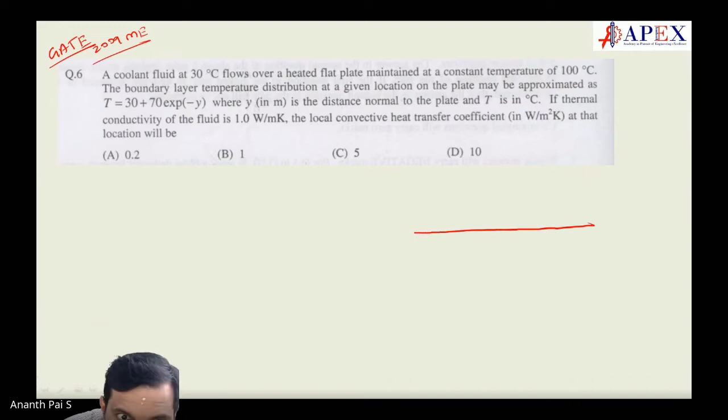It's a bit challenging, not that easy. It's easier only, but not to that extent. We will see.

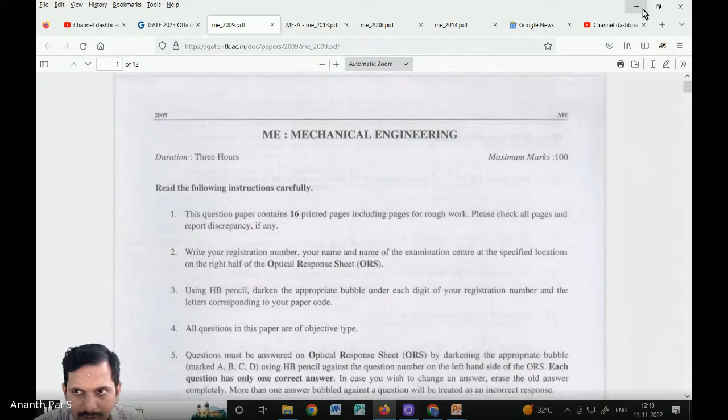Oh, they have not given the answer. We have to calculate. So let us do that. See, Agastya has got one. Let us see, this way would be better. Agastya has got one, what about you? One, Nihal has got one. Others? One. No doubt. So what is dt by dx? It is equal to minus 70 at y equal to 0.

What is q? Q is nothing but minus k into dt by dx. Small q is equal, k is given which is 1, dt by dx is given 70. So q is 70 watts. Fine, 70 watts per meter square.

Correct, correct, no? Okay, 70 watts per meter square. Now what happens? Q is also equal to h into delta T. What is Q? 70. What is h? Don't know. Delta T is 100 minus 30. So 70, so h is equal to.

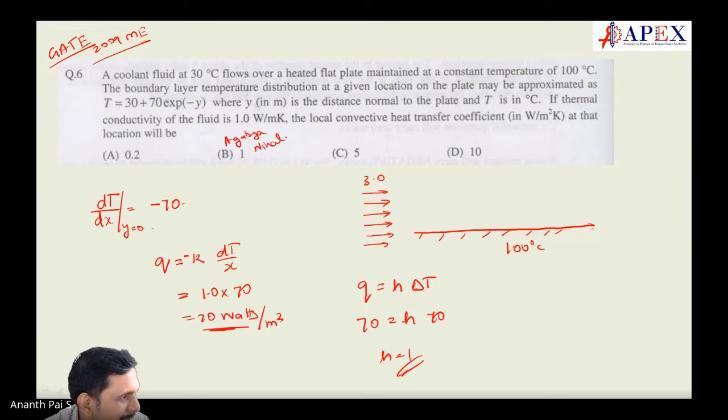So we have to see the previous one, right? Let us see some other question paper other than mechanical. Let us see whether we can find the chemical engineering question paper, how it is, we'll see. Production and industrial engineering has heat transfer too. No, it's thermodynamics, easy. So now first we will start with this. Just keep, let us go with PI. No, we'll go with chemical because chemical is tougher for heat transfer. Not tougher, easy heat transfer, easy. Thermodynamics is tough. So let us search chemical from 2022.

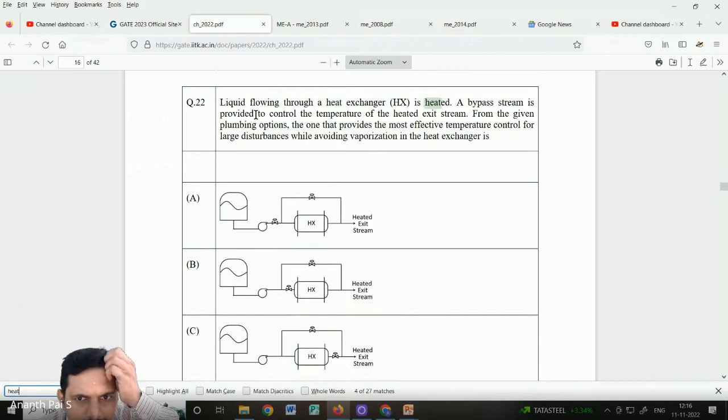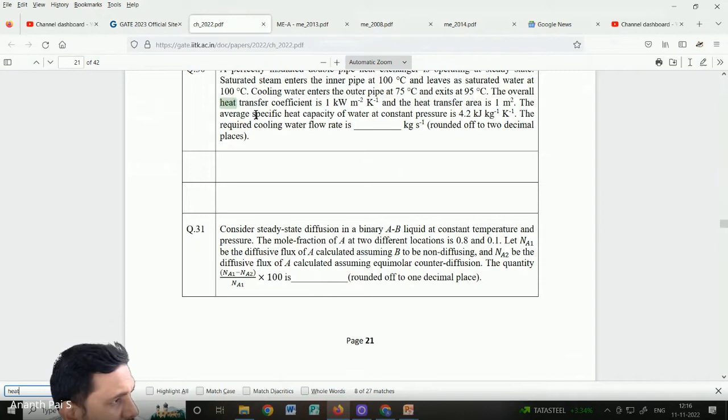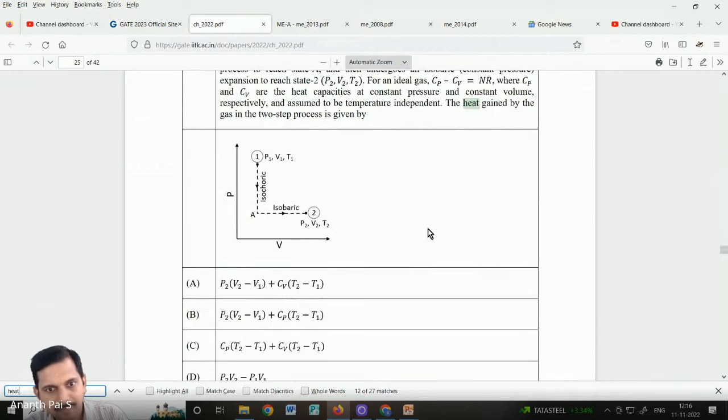This is heat exchanger. Okay, this is very important. Next topic would be this, where it is critical thickness of insulation. That question has come.

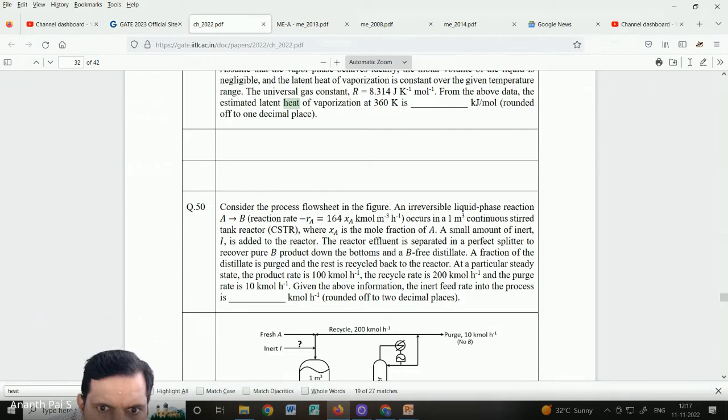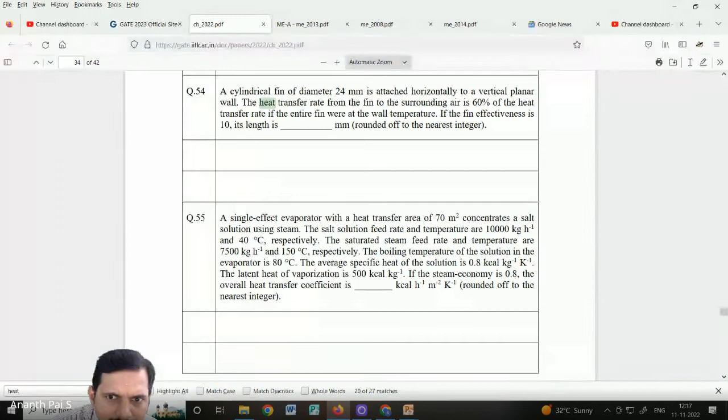Fantastic question that is. We have to come with fins, students. Yeah, there are a lot of questions on fins, which are really, really good.

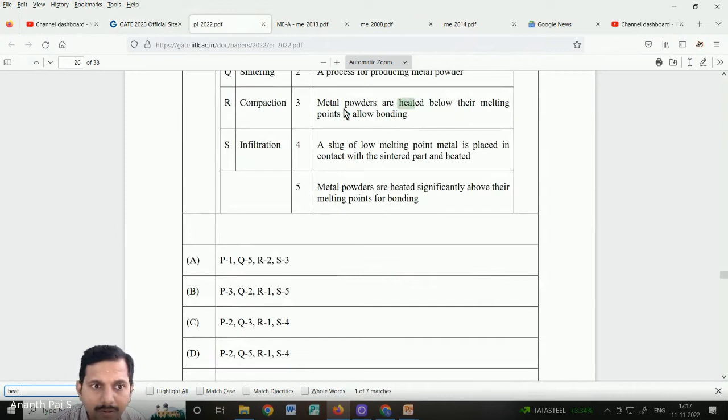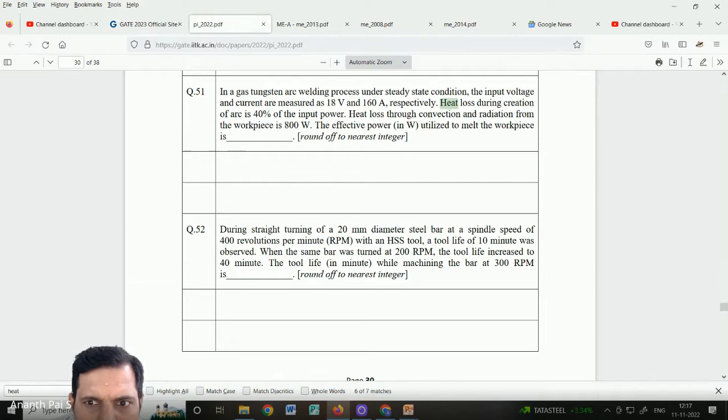No, this is not, nothing. So we'll see PI, where is PI? Nothing. Then what questions do we have? Metallurgy may be there.

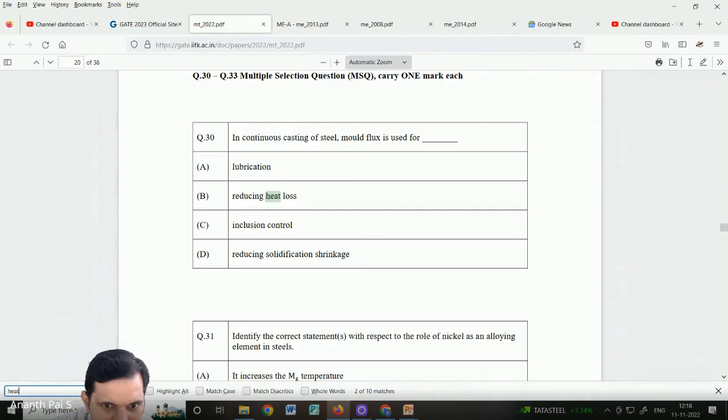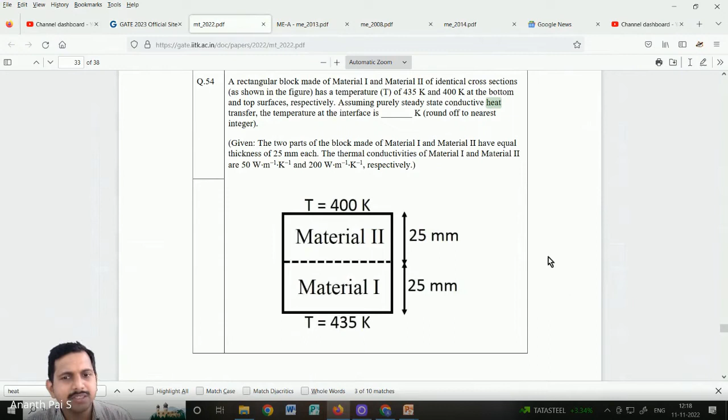See these kind of questions. Yes, this you can do. Students, keep in mind, why do we do this one? Because similar questions may come this time. That is the reason we give it.

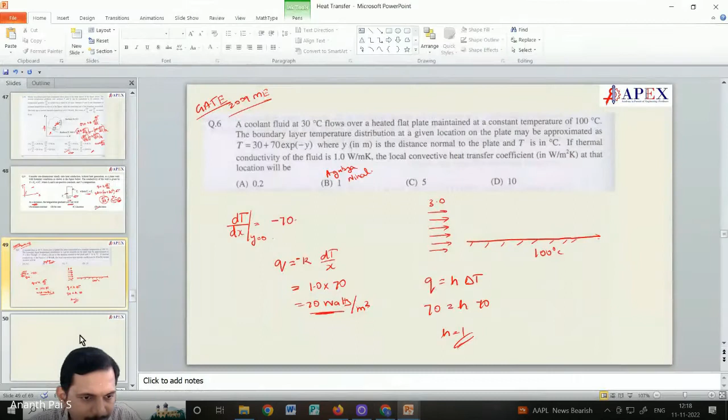PI, no, metallurgical and material science, metallurgical engineering, 2022. So we have a lot of scope here. Mechanical is one place where you will get any number of questions because you have them in other papers too. So 2022 metallurgical, meta. Metallurgical is empty, is it not? Although it is heavy, but still empty. Empty is, it's empty, but still heavy. Okay.

You will be so strong that even in your sleep, if we make you wake up and answer this question, you should be able to answer. And then say, let me sleep, and you sleep again. Oh, great, imagine that.

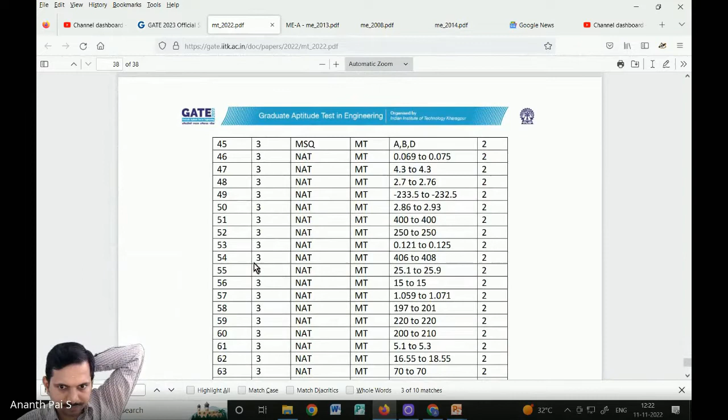Why this one? Why so much of discrepancy? I will see, but I think everybody has to review once. Trishul, what is the answer you got? 428, sir, 428. 406 to 408. Yeah, so 407 good. Yeah, correct. Yeah, 406 to 408. Any answer is right.

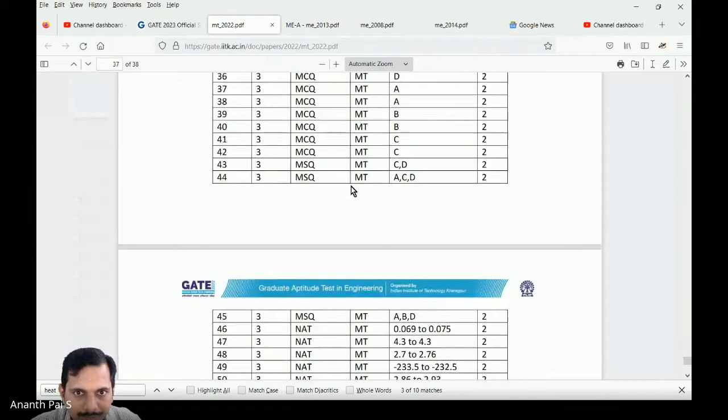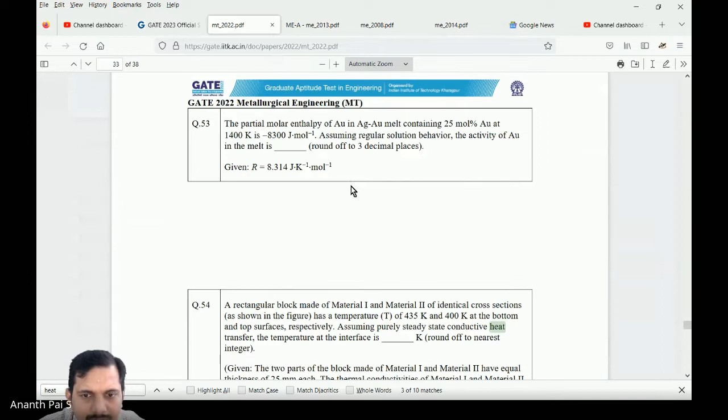PI 2021. Okay, one second, hold it. Hold it. Okay. Let us finish off this one. Heat. That's it, no more question in mining.

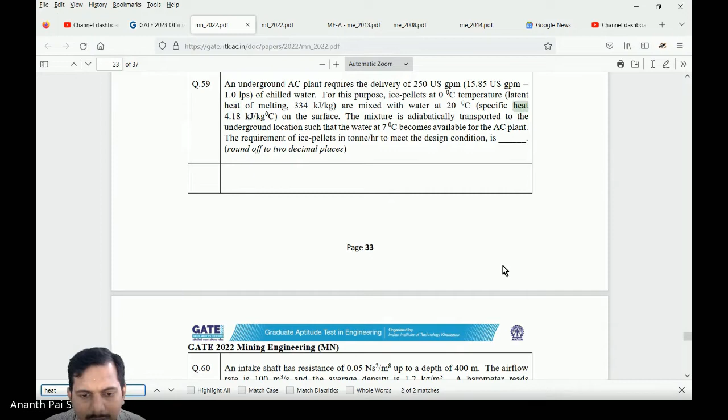Next, what else is there where you can get heat transfer? Chemistry, even if it is there, I don't know. Physics you can get heat transfer, but no one. Aerospace, petroleum also will get it. Aerospace you get it. They are very good at fluid mechanics, but we don't have it. Okay, leave it.

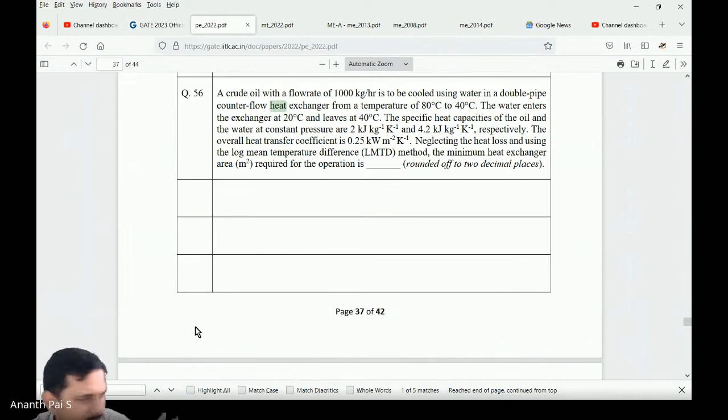Then we have what you said, petroleum. Where is petroleum? Petroleum don't generally have it because they are more with chemistry. We have LMTD though, log mean temperature difference. We'll go with petroleum next, do some problems. Only one question on log mean temperature difference. Okay, petroleum we'll have. Then what else?

Done. Maybe instrumentation, instrumentation is about electronics. PI, 54th question. This is P. Oh, I'm sorry. That also we will check. Oh, this cannot be searched.

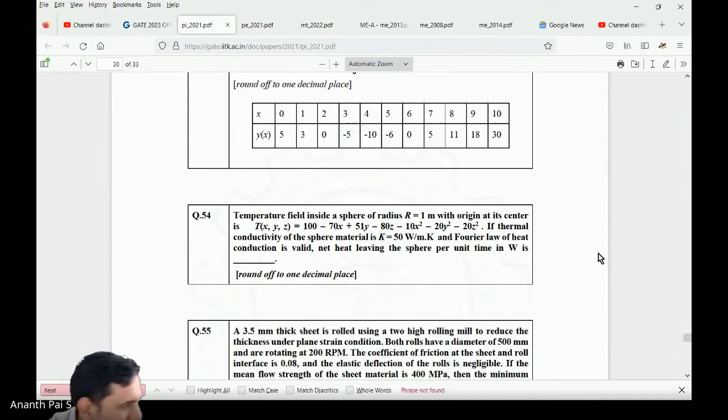It was a very good question. Challenging, very challenging. It's a really, really challenging question.

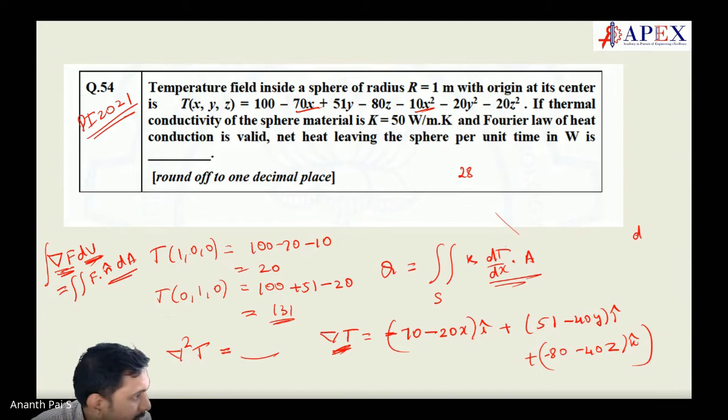See here, this one. See, generally, I will explain this, students. What is Fourier law of heat conduction? Fourier law of heat conduction is Q is equal to minus KA dT by dx, or del T.

Now this is okay when along the whole A, del T is constant, but del T is not constant over the whole area. You have to take small areas where del T is constant. So what you do, Q is equal to actually double integral of

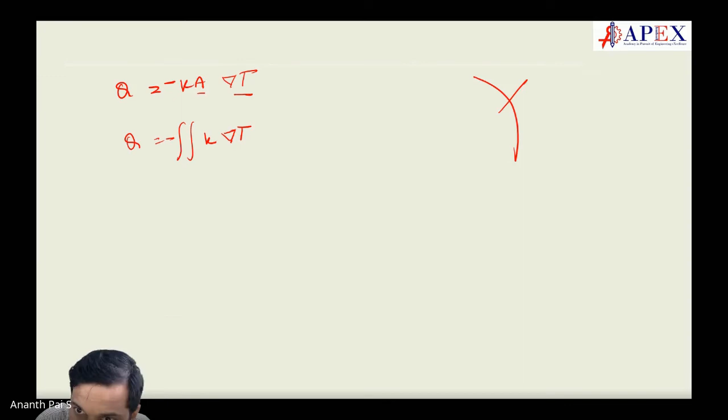minus of K into del T. Now here del T has a direction, del T has a direction. Del T is the gradient. If this is like this, if del T is in this direction, area in this direction, the heat transfer along this comes as K into A dotted del T dotted with dA.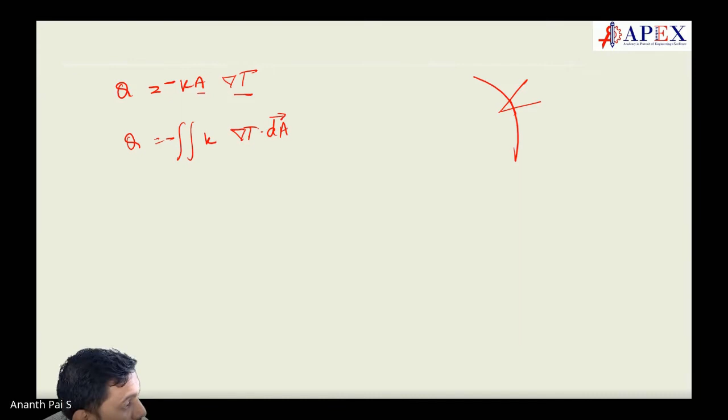Very important, that dot has to be very important. Now this is fine, this is surface integral. Now how to convert surface integral to volume integral? You say integration of K into say some unit... surface integral of F dotted with dA is equal to volume integral of del of F into dV. This is Gauss integration formula.

Okay, now what is del of F? Here F is what? F is del T. Now if you have to convert it into volume integral, you put volume here and you say K is okay, constant, del of T into dV. Del of F, is it not? So del of F. Easy.

This you cannot guess, I will tell you. And I don't think any mechanical engineering book will have that. They always do post processing. After you get a tough question, this will come. Oh, mechanical last time only the tough question. This time let us do it. It's not like this here.

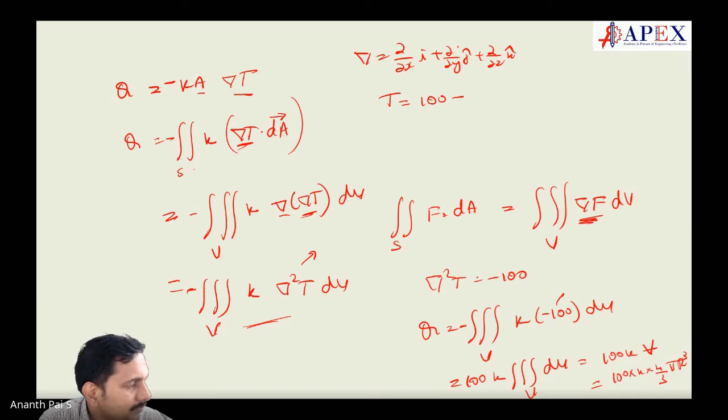I'll do it next. So T, what you say, del is dou by dou xi plus dou by dou yj plus dou by dou zk, and T is what? 100 minus

70x, 51y minus 80z, 10x square.

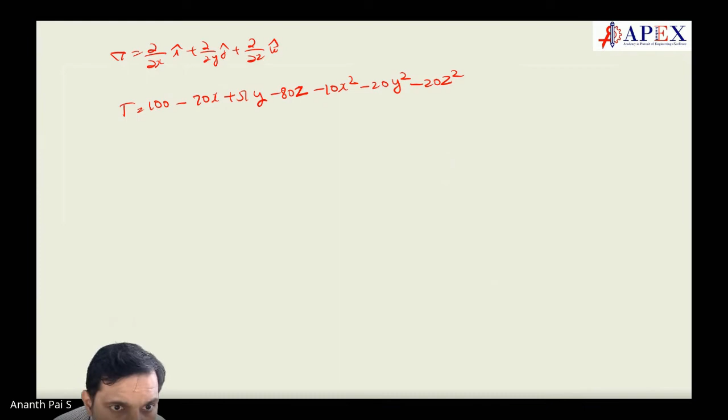This becomes 2 times, so minus 20x, so many, plus next when you do this, y should come. This becomes y, 51, then here y square minus 40y j.

What happened? You got the answer? No. You know why wrong answer? Right? Plus, or I'll put minus. Sorry, yeah, plus.

Del square. This becomes -70, -20, then -40, -40.

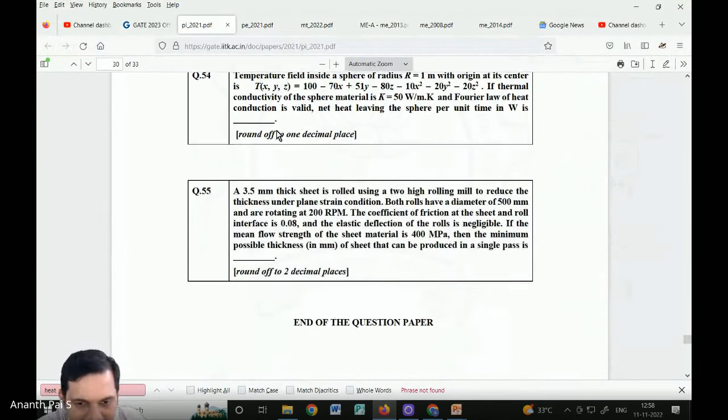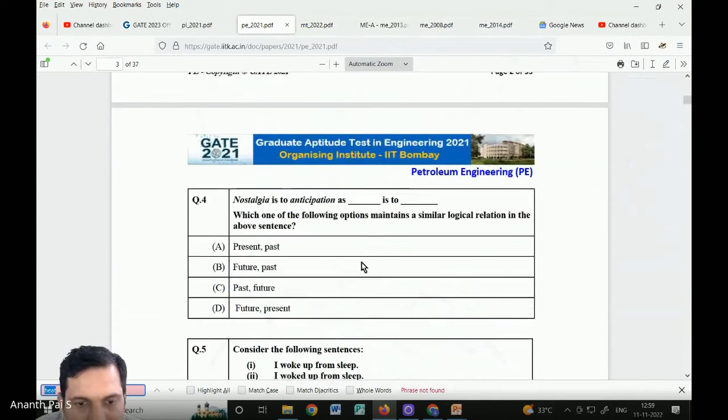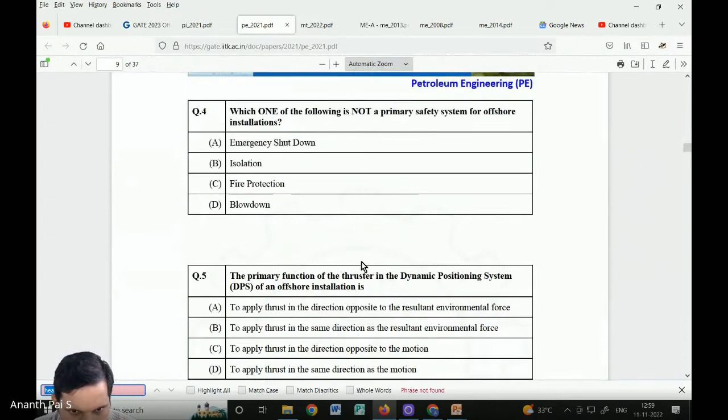2019, is it? Okay, I will search in 2021. Okay, fine. Not there. Metallurgy, aerospace. Okay. Not there, right? PE I will check. No, you cannot search like that. This is petroleum.

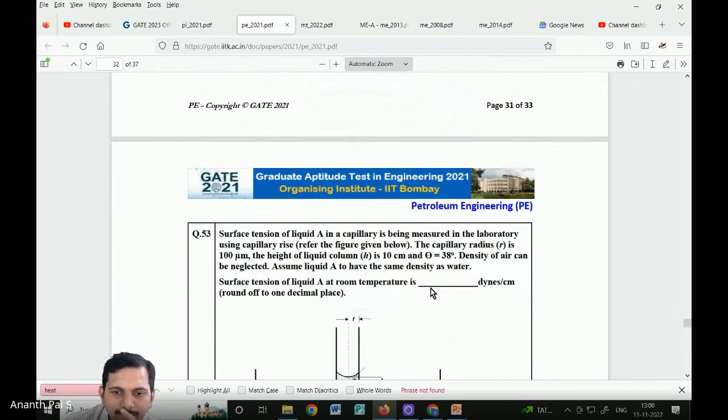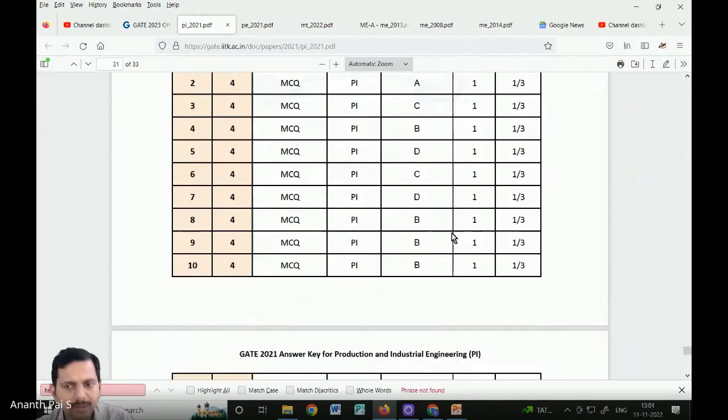What's the answer for previous one? What did you get, Trishul? What is 700? I got 2000, correct answer. 2000 or 20,000, pa? Yeah, the answer is here.

Yes. Did you get it, Trishul? I think some point mistake. I got, ah it, 2940. Good, point difference.

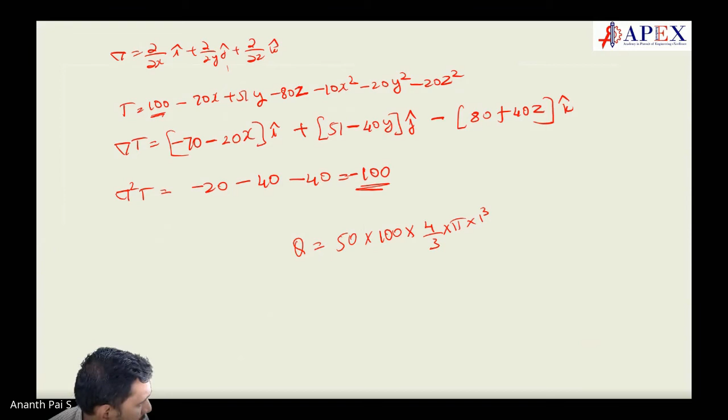So it is 5000 into pi into 4 by 3, or 5000 into 4 is 20,000. 20,000 into pi divided by 3, something more than 20,000, right?

No? Pi by 3 you have to calculate. Pi by 3 is 1 point, pi by 3, 3.14, so by 3. You can check it out.

These kind of questions may be there in some of the exams like HPCL, where they don't give you the calculator. You have to calculate on just like that and you have to solve. Makes sense? So next one.

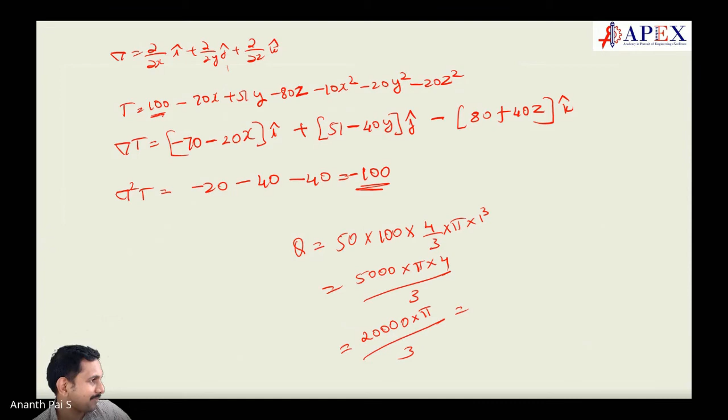We are searching for the next questions. P, we did not get any. Next. Chemical, did you check 2021, Mr.? You checked, no? Did not. I will check. Chemical, we will check, 2021, I will check. 21, there is a problem. We cannot search.

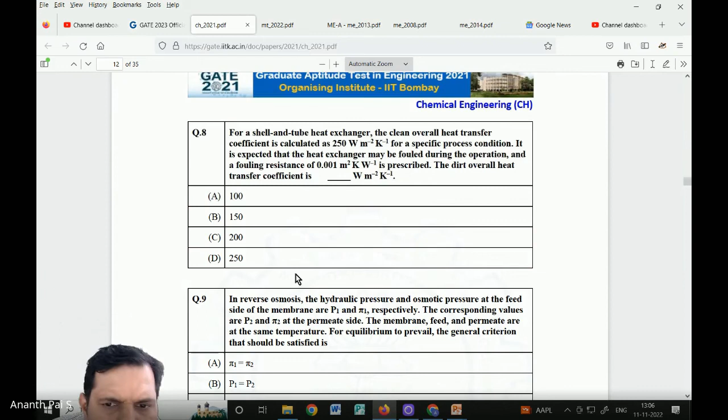A good question in heat exchanger design.

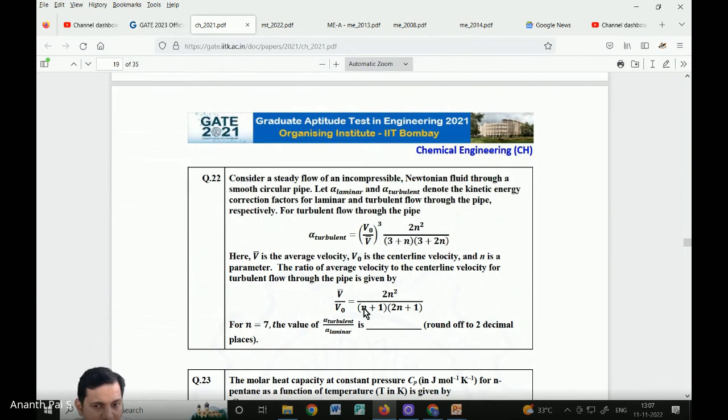A good question on convection. Observe. Convection, good question is there. Turbulent flow through pipes.

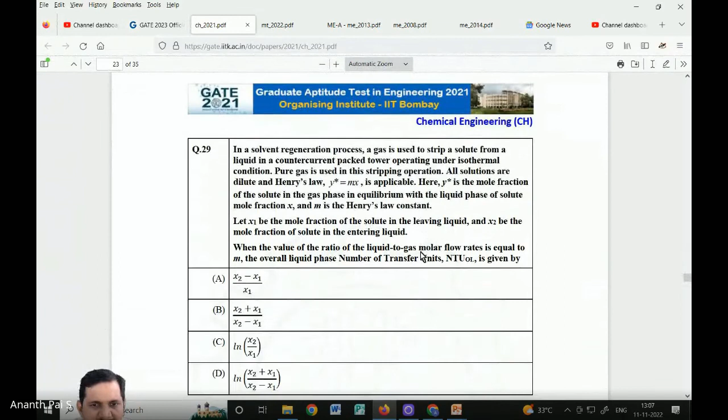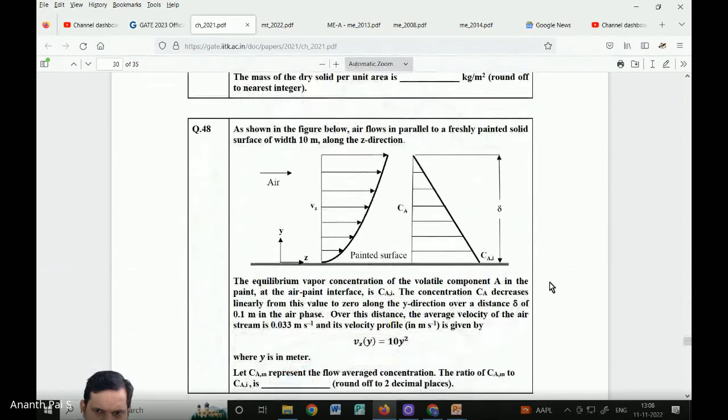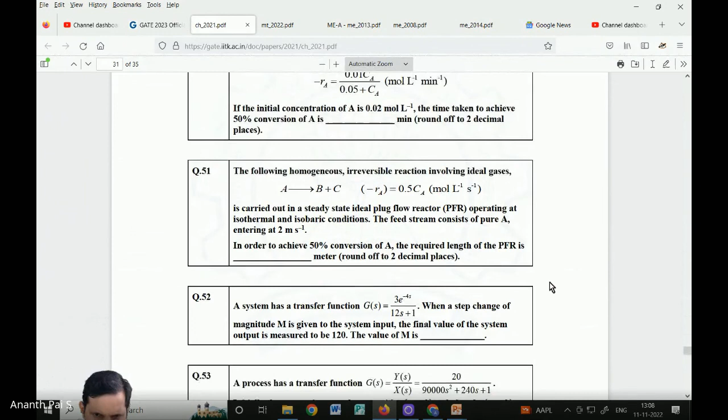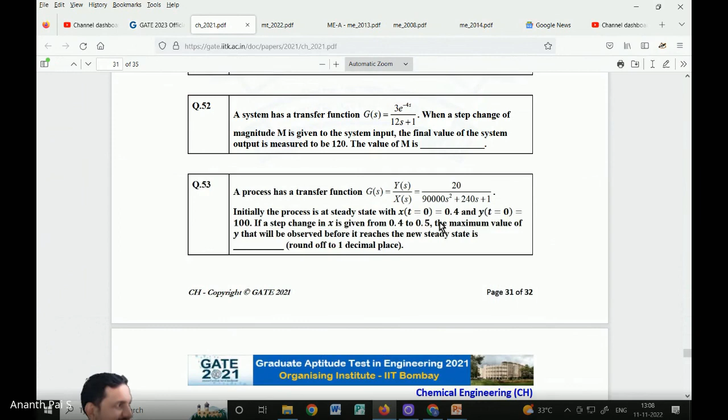Done, no questions. 2020 you have checked. 2017, anybody is checking? Any paper? No.

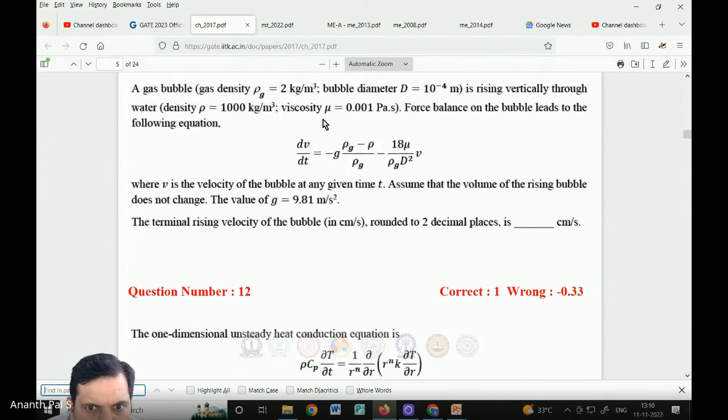There are good questions in chemical engineering, but in first chapter it is not good. This is a good question.

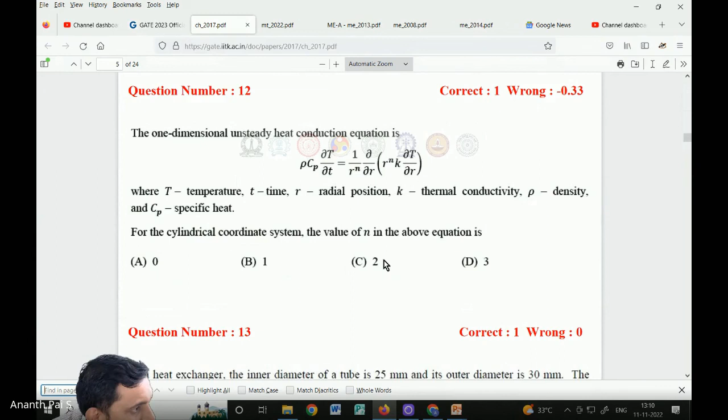Ah, send me that. Send me a screenshot of that.

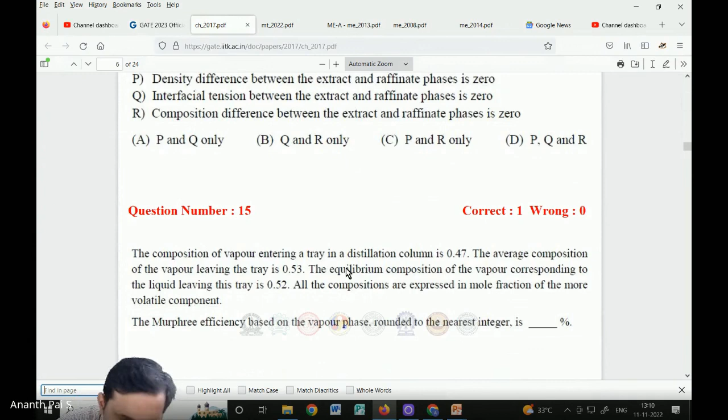Ah, SK Mondal. He's a very famous teacher in. Yeah, yeah. Yes, yes, yes.

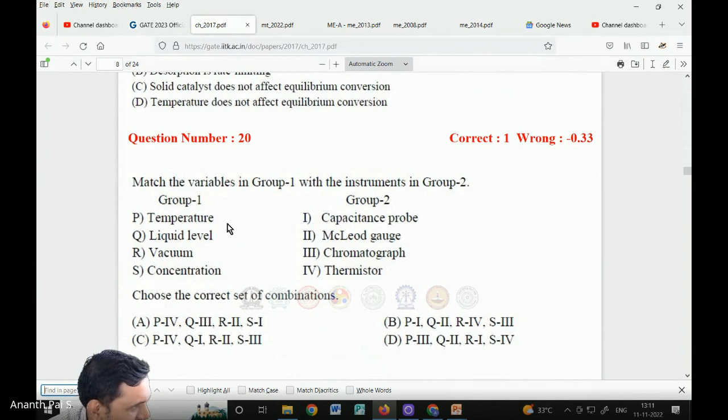You can share it on the group. Yeah, yeah, yeah. I will not solve it here, okay, but you can solve it. Those things, if you have doubt, you can ask the doubt, and I will be able to solve it. Okay. He's doing a good job. In fact, he's giving free of cost to everyone. Yeah, yeah, he writes his own notes and gives it free of cost. Yes.

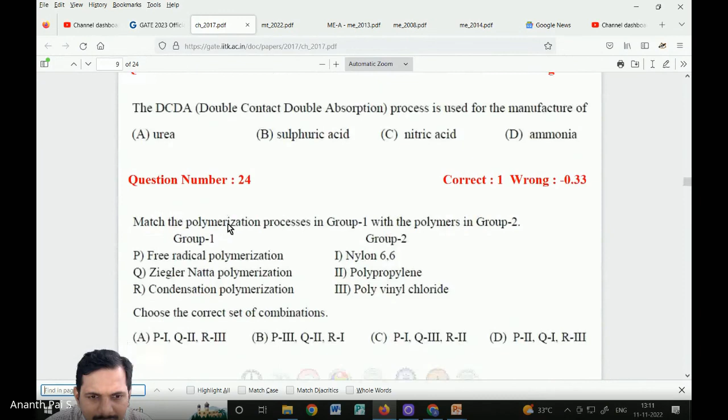Anyhow, we will stop it, students. Okay, you can check it out. I think no more questions on the first chapter.